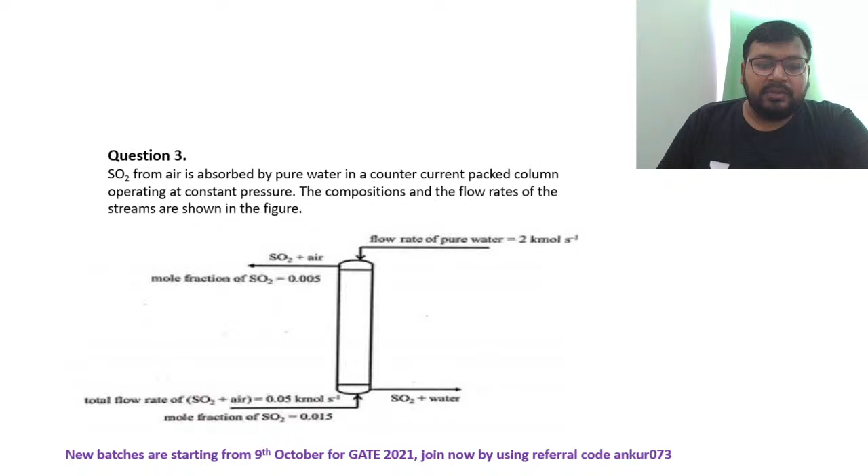Then this question, I explained it, but first I wrote all the data, then I told you what is the meaning of dilute operation.

Then we applied the absorption factor formula. Then we calculated the NTU using a very simple formula: entry minus exit, divided by exit minus equilibrium.

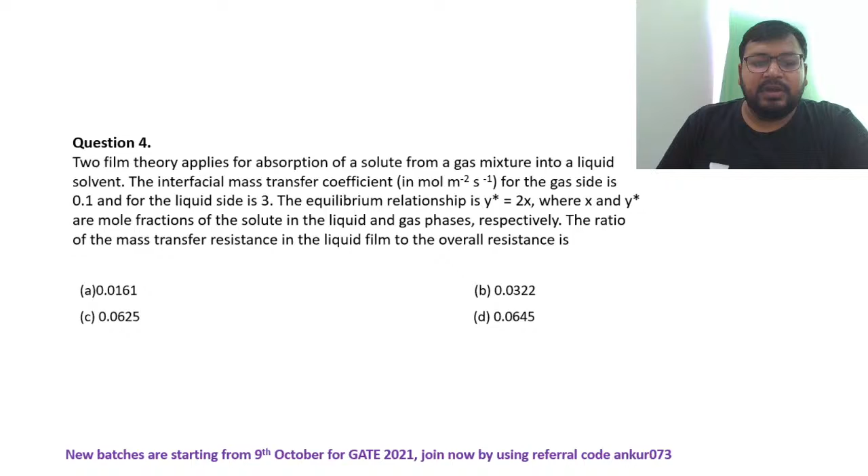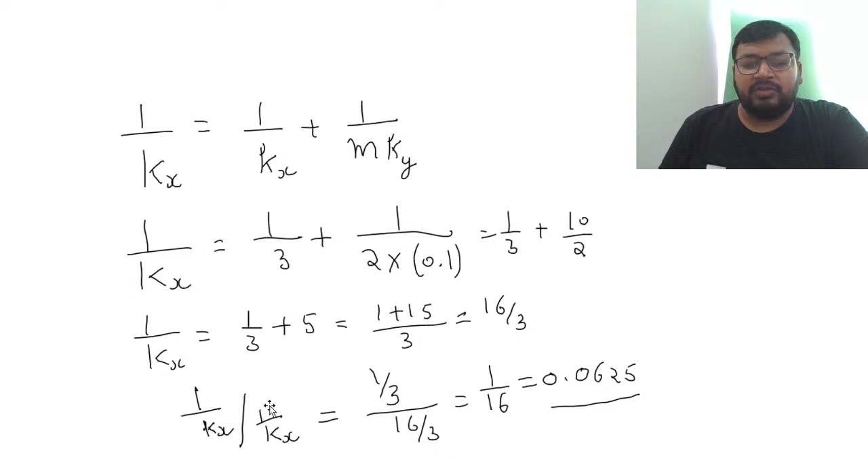After that, in the two-film theory, we first decide the direction of transport. Then we write down the known data. Then we use the relation of the overall mass transfer coefficient formula, and then we calculated the resistance of the individual liquid side relative to the overall mass transfer resistance.

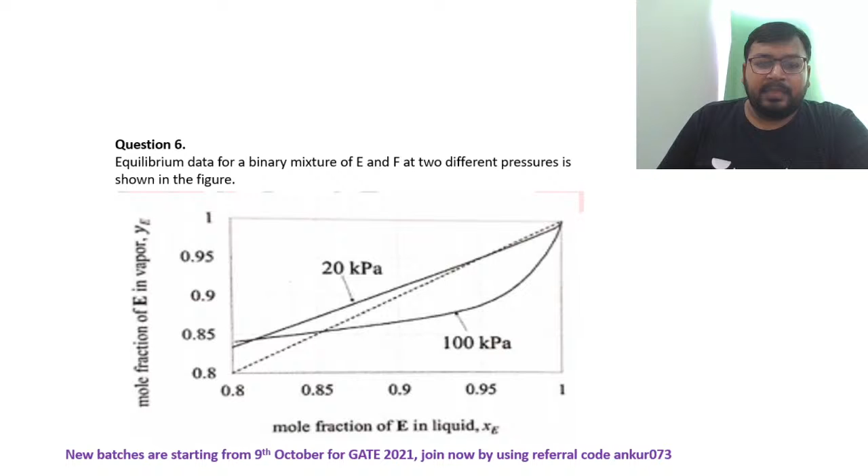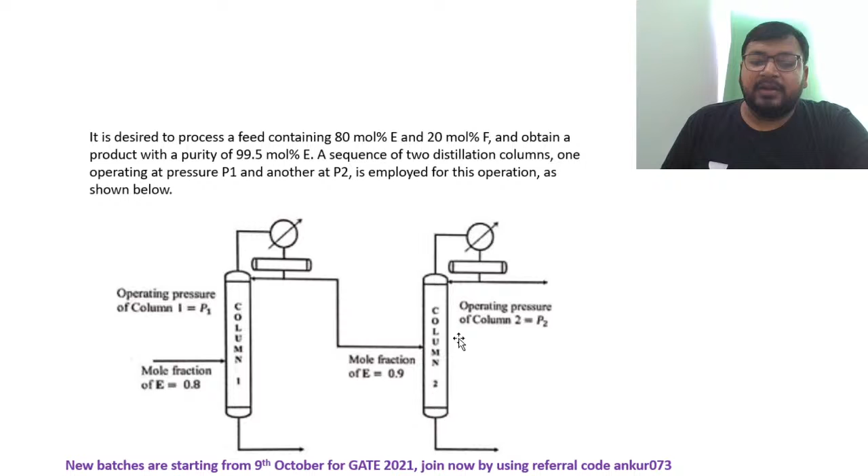Then we have this question, and it is very simple guys. All the data is given: the feed enters at 0.8 mole fraction, then from the top we get a mole fraction of 0.9 for the distillate. Then it enters column number 2, and we get the product out. So we determine which column operates at what pressure, and what is the purity.

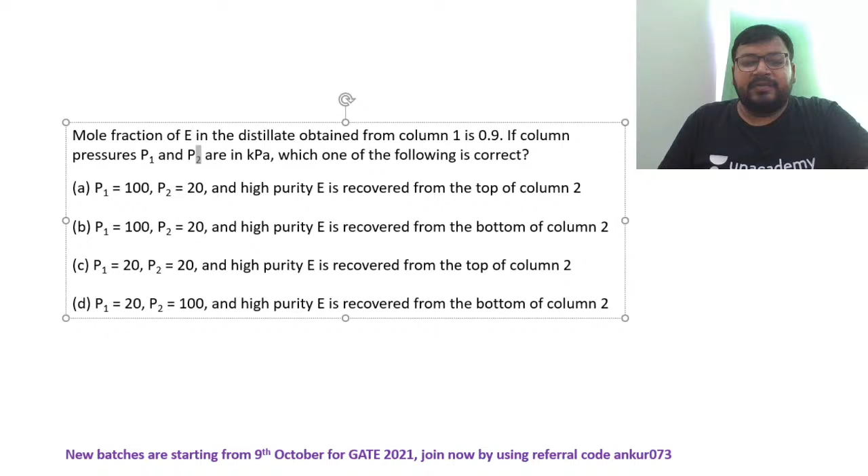Okay guys, so just correcting the representations. 0.8 is the mole fraction at which the feed is entering, and as we move forward we reach the equilibrium line operating at 20 kilopascal. So the first column operates at 20 kilopascal, and then we get a distillate of 0.9 mole fraction. This distillate becomes a feed to the second column, and above there is nothing, so we have to go down.

Below we get the second curve operating at 100 kilopascal, and then we get the product at a mole fraction of 99.5.

This 99.5 we are getting below the diagonal line, and that's why we said the product will be obtained at the bottom of the column, because D1 is obtained at the top of the column and it is above the diagonal. Analogically, this point is below the diagonal, so the product should be obtained at the bottom of the column.

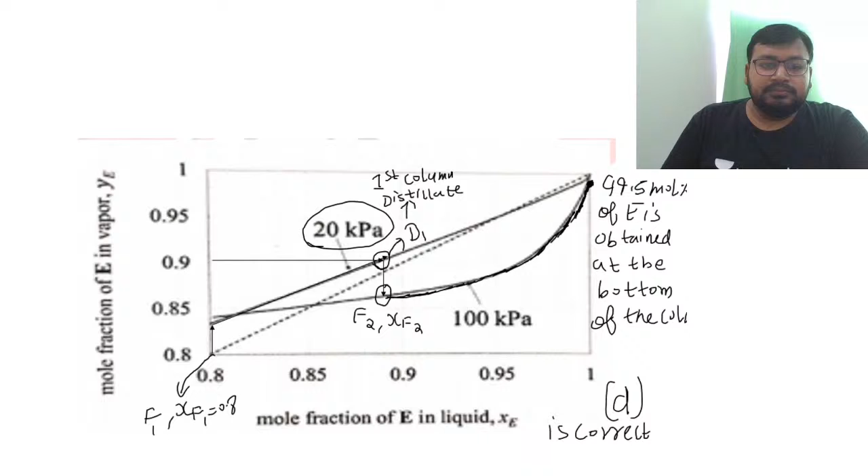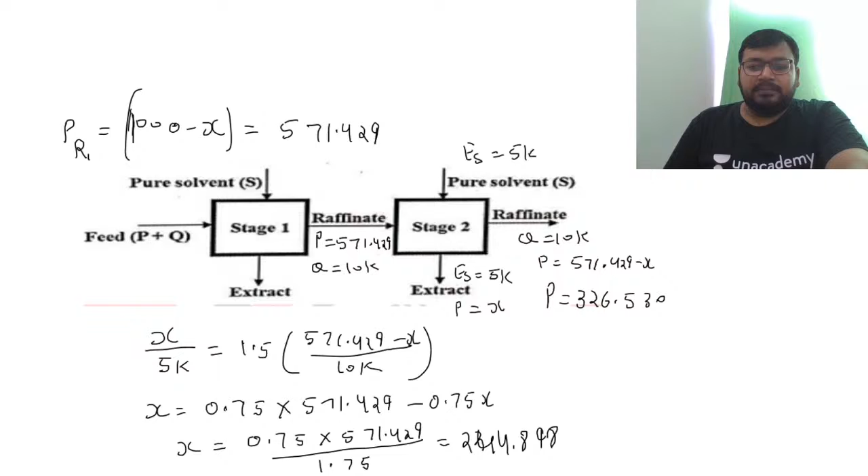Then we solved this 8th question, which we had jumbled also yesterday.

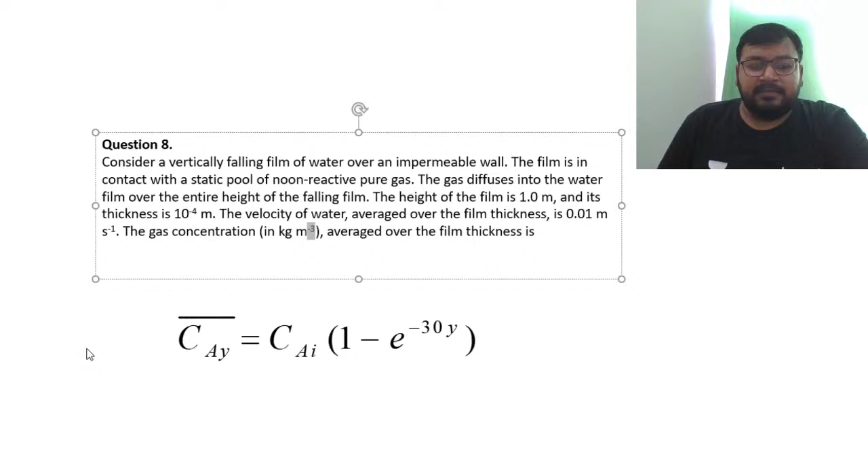In this case, we first calculated the mass transfer taking place within dy, and that mass transfer is mass in minus mass out, multiplied by the area. The area available for this mass transfer is the width of the wall, and it's clearly given that along the width the concentration is invariant, so concentration is not changing along the width. So there is no change in the width, multiplied by delta, the thickness of the water film.

So W into delta becomes the area, and the direction of transport is in the y direction. That's why the area available for mass transfer will be W into delta, as the area must always be normal to the direction of diffusion.

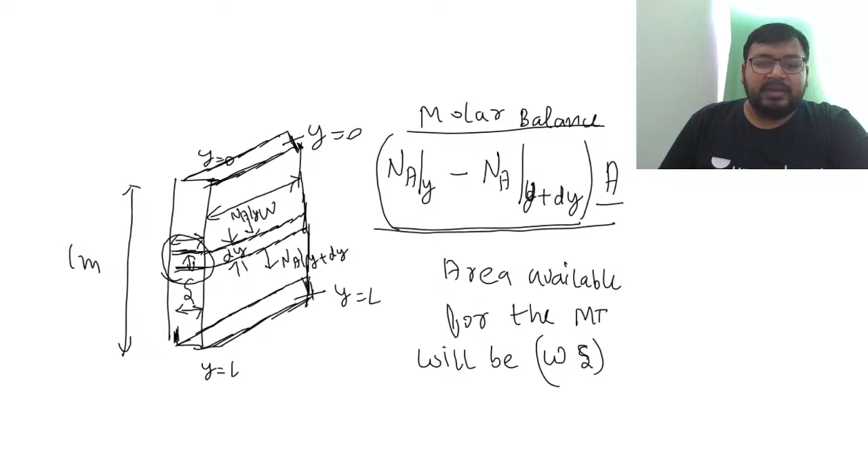Then we calculated how much mass is diffusing from the gas side to the liquid film, the water film. We calculated it as NA into W into dy. W is the width, over the width it is going, and for a small thickness of dy, we calculated how much mass transfer happened within dy.

So mass in was Na at y, mass out was Na at y plus dy. So the mass transferred along that dy, that movement can be written as Na into A, where A is W into dy. So for that small thickness, the area will be dy into W.

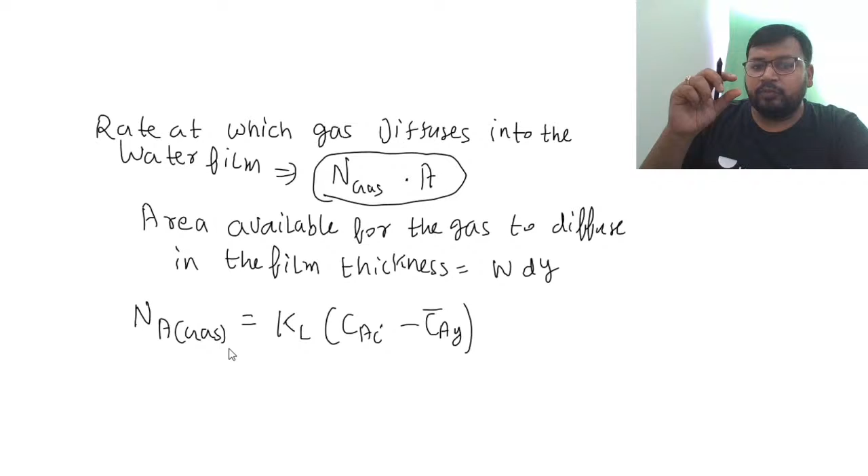So that is the mass that must have transferred from this small width - this is the mass entering at y, and this is the mass exiting at y plus dy.

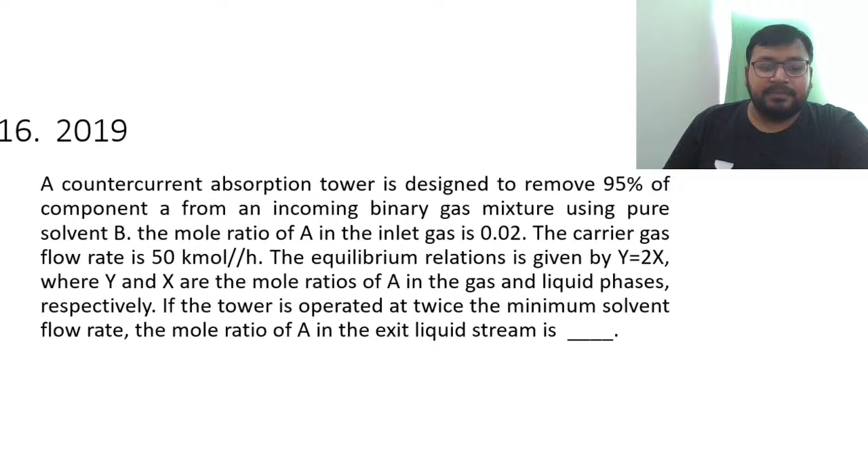Then we calculated this absorption question. We made the diagram, the absorption column, the graphical thing. We calculated the slope, and from that slope I calculated the value of LS optimum, which is twice the minimum, and then I applied the mass balance to calculate the actual value.

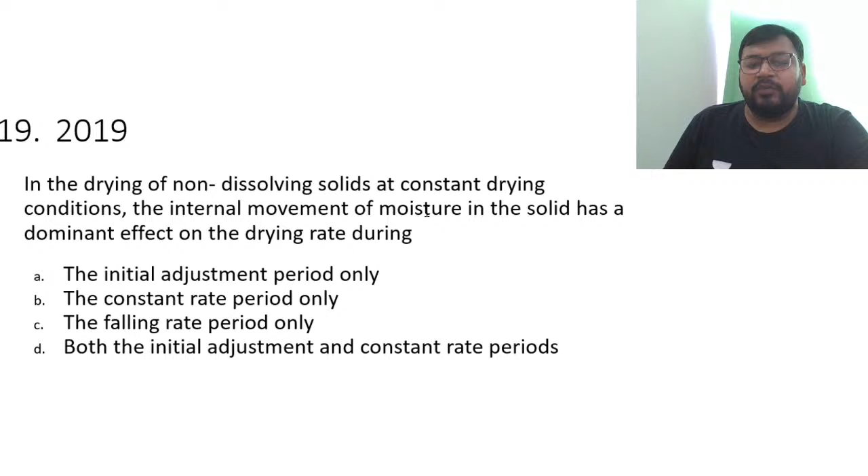Then we have the drying of non-dissolving solids. So guys, when we do the drying and the internal movement of moisture is taking place, internal movement of moisture is taking place only in the falling rate period.

And how does the movement take place, guys? The movement may take place by capillary action, or movement may take place by diffusion.

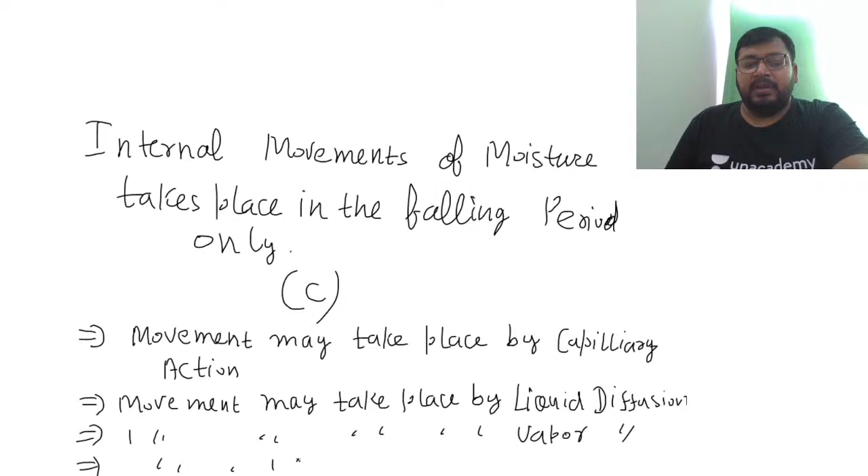Movement may take place by liquid diffusion, movement may take place by vapor diffusion, and movement may take place by the solids which shrink due to heat. So some solids thermally expand while some solids thermally shrink. So by any of these reasons the movement can take place.

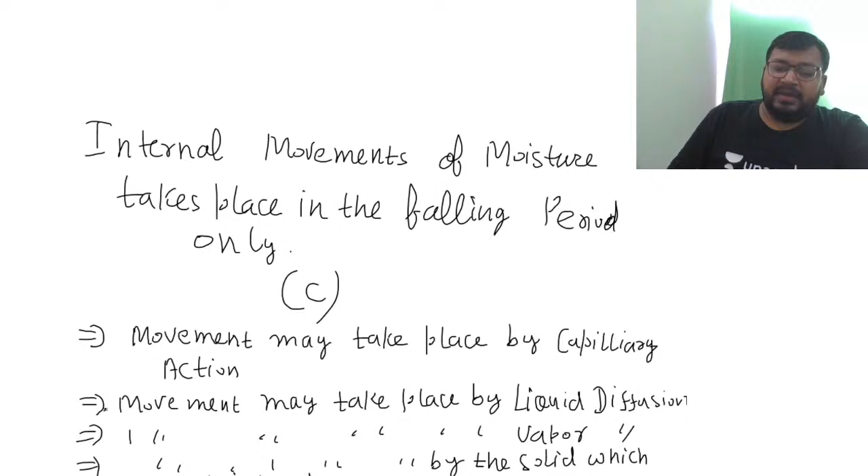And guys, this is the next question. So take your time, write this down first before moving ahead.

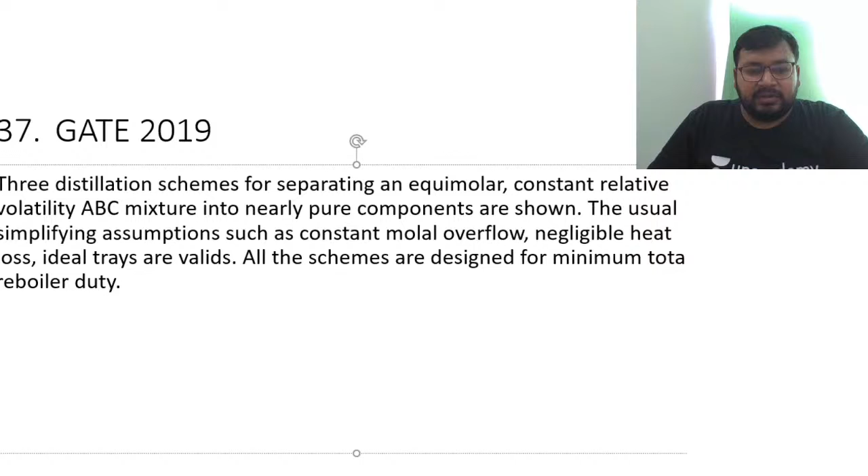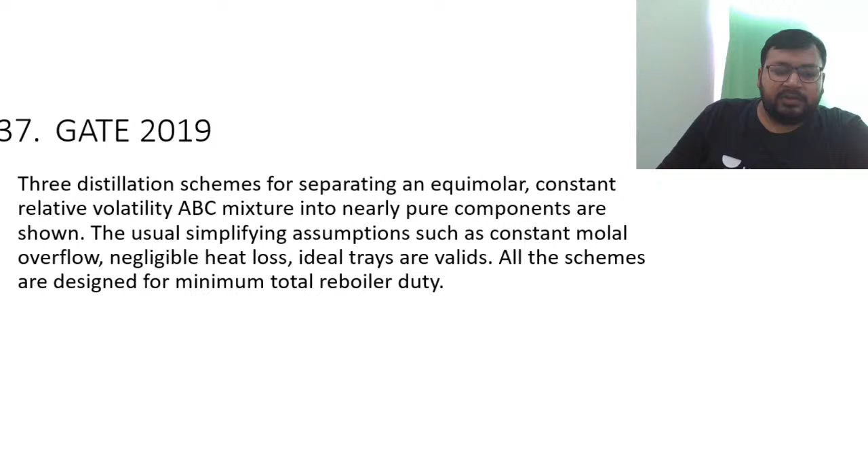I hope it is visible to you. Write it down so that I can show you the next slide. I hope you've written it down. These are the sequences, you can make the sequence, and then I will show you the questions.

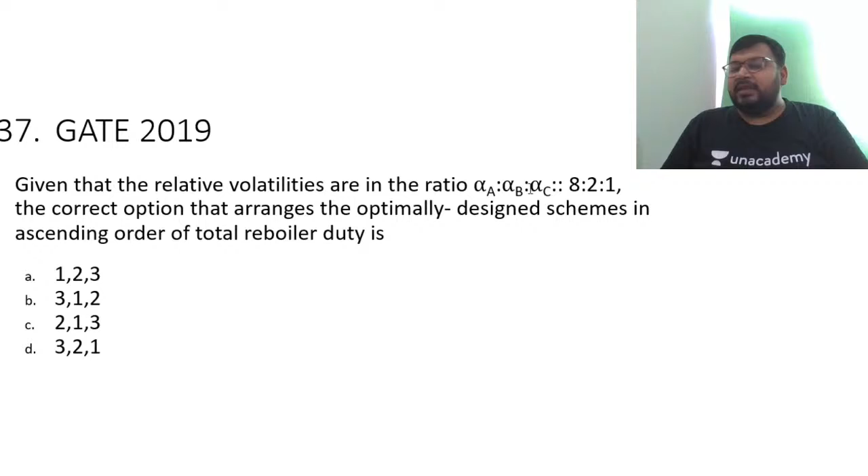And according to B and C you can see which one is more volatile. A is highly volatile because it has a relative volatility of 8 with respect to C. B is volatile but not that much because it has a relative volatility of 2 with respect to C, and C is very less volatile.

So the component which can be easily vaporized, you collect that at the top, and the component which is difficult to vaporize, you are collecting that at the bottom. You are collecting A at the top since it can be very easily vaporized, but which are difficult to vaporize, you are collecting them at the bottom.

So at the bottom, if you get a component which is difficult to vaporize, what will happen? The reboiler duty will increase.

Reboiler duty increase करेगी, because अगर यहाँ पे A होता, then A can be easily vaporized and it will contribute to the vapor flow rate. तो जो भी वेपर फ्लो रेट यहाँ पे जाता उसके अंदर A के वेपर्स होते. ठीक है, तो A कंट्रीब्यूट करता अगर A होता तो, बट क्योंकि A नहीं है, B और C है, तो B और C को वेपराइज करना, एक वेपर फ्लो रेट जनरेट करना, इट्स टफ. तो रिबॉयलर ड्यूटी हेयर इज मोर.

एंड अगेन, अब सिर्फ यही नहीं, B और C को यहाँ ही नहीं, यहाँ भी अब C को वेपराइज करना है टू मेंटेन दैट वेपर फ्लो रेट. नाउ दैट इज अगेन वेरी टफ बिकॉज C इज हैविंग ए रिलेटिव वोलेटिलिटी ऑफ 1. इट इज द रेफरेंस.

ठीक है, हमेशा याद रखना ये एक रेफरेंस में कैलकुलेट होती है. जब मैं बोलता हूँ कि अल्फा इज 2, इट मीन्स विद रिस्पेक्ट टू B, A इज ट्वाइस एज वोलेटाइल. ठीक है, ये इसका मतलब होता है. सो C की 1 है, दैट मीन्स विद रिस्पेक्ट टू 1 वी आर कैलकुलेटिंग दैट द A कंपोनेंट इज 8 टाइम्स एज वोलेटाइल एज C.

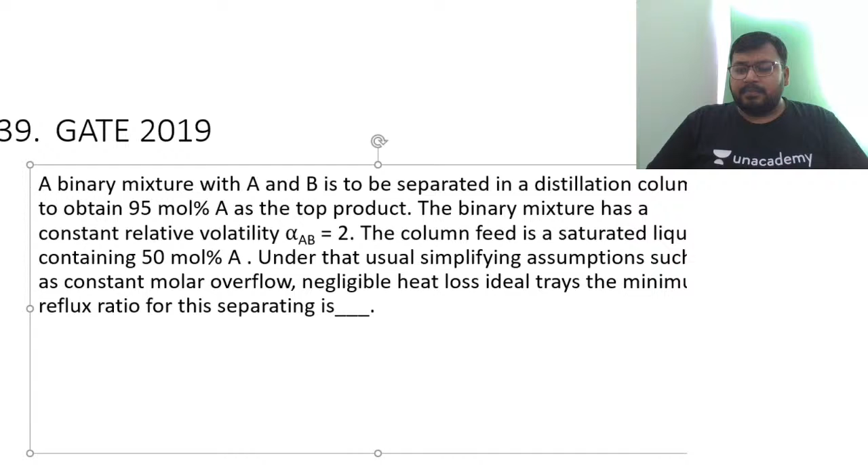A binary mixture with A and B is to be separated in a distillation column to obtain 95 mole% A as the top product. So 95 mole% A as the top product. The binary mixture has a constant relative volatility of 2. The column feed is a saturated liquid containing 50 mole% A. So for saturated liquid, Q is equals to 1, and 50 mole% A, that means XF is equals to 0.5.

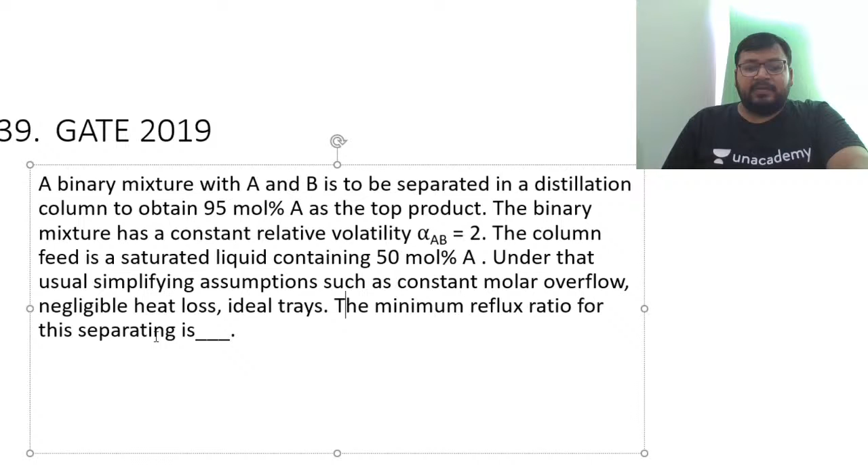Under the usual simplifying assumptions such as constant molar overflow, negligible heat loss, ideal trays, the minimum reflux ratio for this separation is...

You need to find the minimum reflux ratio, guys. And what is minimum reflux ratio? Minimum reflux ratio is xd minus y dash divided by y dash minus x dash, where, as I told you, what is x dash y dash? X dash y dash is the point of intersection

between the feed line and the equilibrium curve. So guys, alpha is given as 2, so that means the equilibrium curve, alpha is given as 2, so equilibrium curve can be written as y equals 2x divided by 1 plus (2 minus 1) into x, so that is 2x divided by 1 plus x, so that is the equilibrium curve. And for saturated liquid, for the feed line, first of all, what is the feed line, guys?

Y is equals to minus q by 1 minus q into x plus xf by 1 minus q. So for saturated liquid, we know that q is equals to 1. So when q is equals to 1, what is the slope? The slope almost becomes infinity.

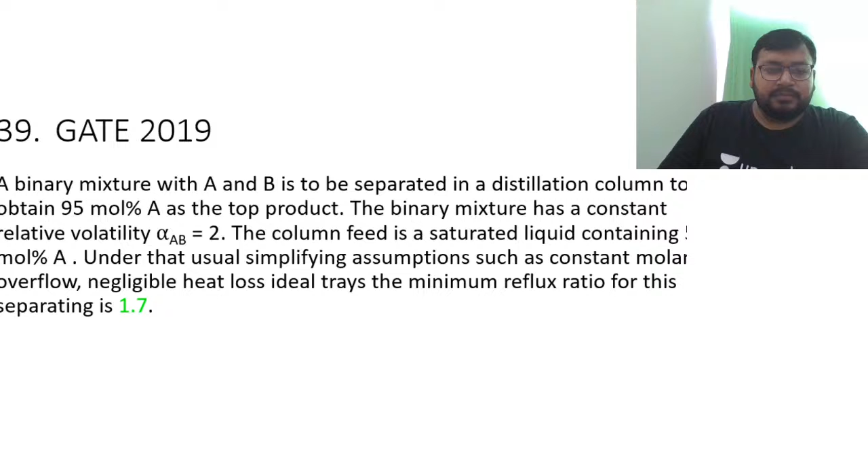Okay, take 3 minutes again to solve.

So Ankur Datta has commented 0.66 and 1.81.

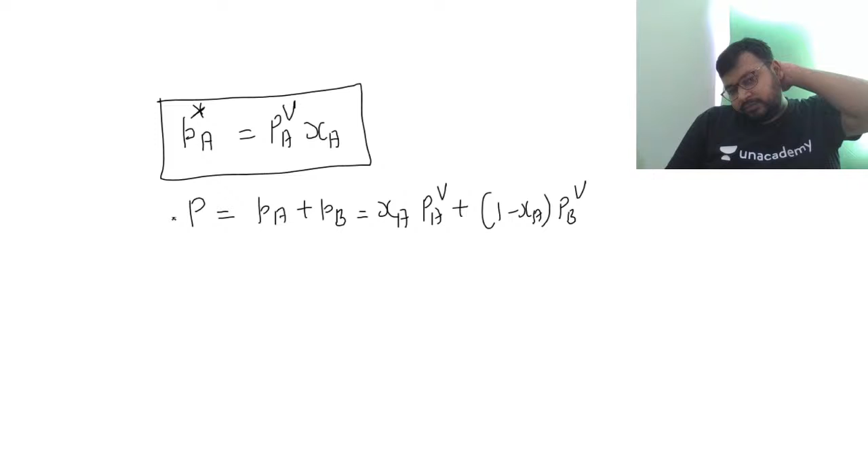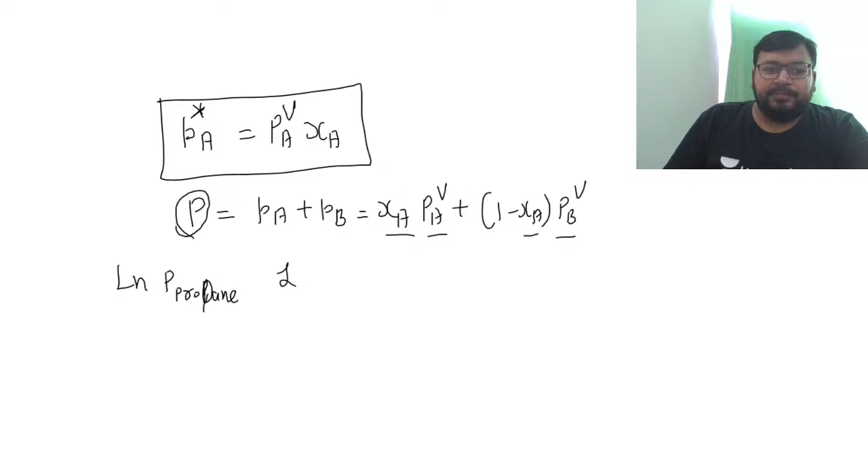So we need to calculate the total pressure. We already have the concentration. What we need is vapor pressure of A and vapor pressure of B. Saturated liquid is at 55 degrees Celsius, so let us calculate the vapor pressure of propane and vapor pressure of butane at 55 degrees Celsius.

The Antoine equation is given to you. Just put down the value of the temperature and then calculate the Psat in bar. Calculate fast using the virtual calculator - what is the value for propane and butane?

If you calculated correctly, the value of the vapor pressure of propane at 55 degrees Celsius, that is 328.15 Kelvin, comes out to be 18.65 bar, and the value of the vapor pressure of butane at the same 55 degrees Celsius, or 328.15 Kelvin, is 5.59 bar.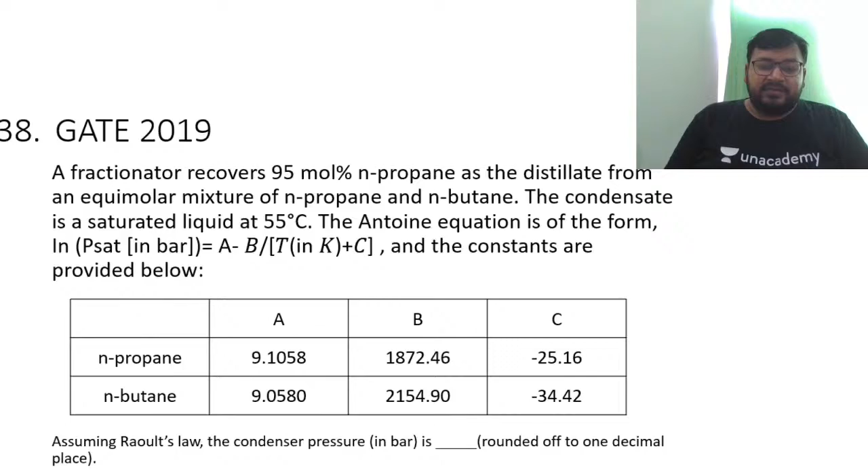So vapor pressure values are known at 55 degrees Celsius for A as well as B, that means for propane as well as butane. It is given that 95% of N-propane is recovered as the distillate, so the value of XA comes out to be 0.95. So the total pressure can be calculated - just put down the value of PA vapor and PB vapor. The total pressure comes out to be 17.97 bar.

If you calculated it, that will be your answer, coming out to 17.97 bar. That's a very easy question.

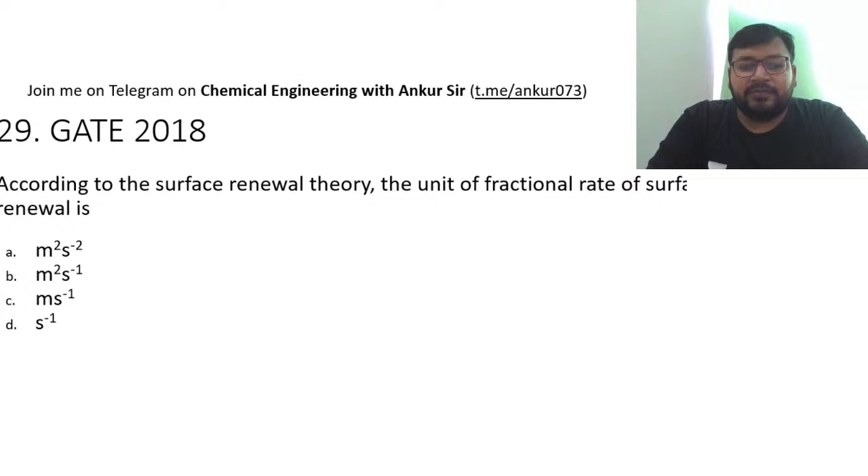So what is surface renewal theory? Surface renewal theory says KL is equals to under root of DAB into S. This S is known as the surface renewal frequency.

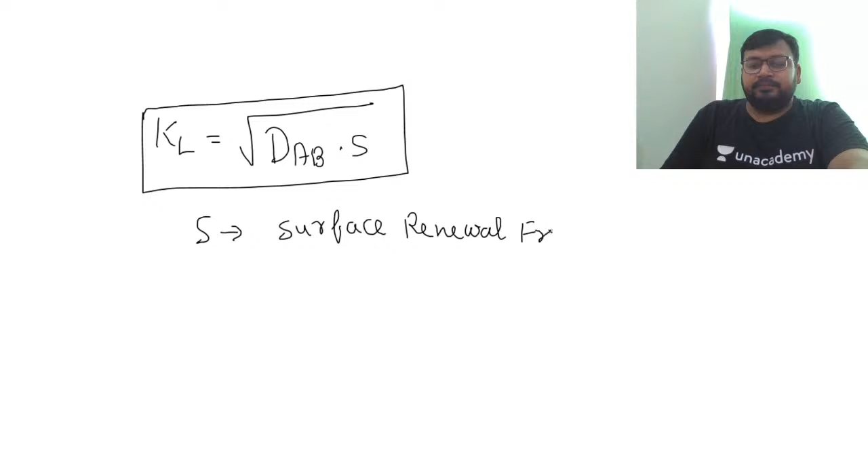So what is surface renewal frequency? It is the fraction of surface area renewed per unit time.

So guys, if this is the spherical bubble and that is a liquid particle coming down, that is the total area that the liquid particle will cover. Let's say this total area is AT. Now the area covered by the liquid particle is, let's say, this much.

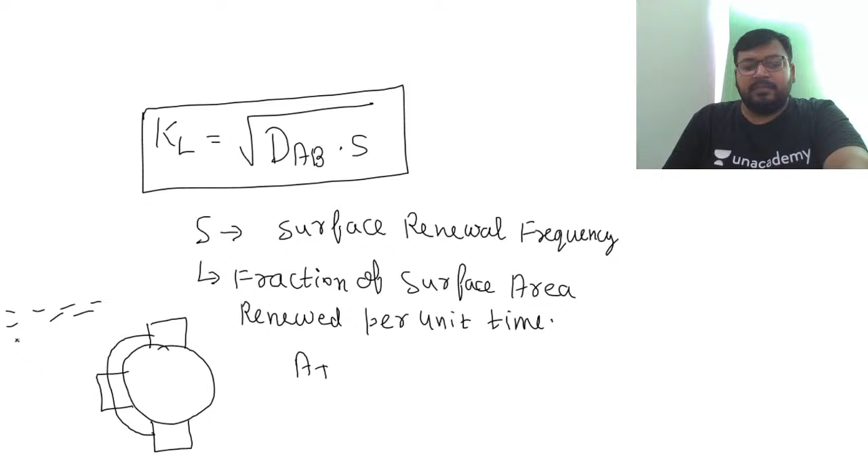After that, what will happen? From the fresh bulk, a liquid particle replaces it, and after the replacement, the new particle is there. So the area left for the new particle to cover will be this much only. We need to calculate how much area is covered.

So let's say the area covered is AC. Total area minus covered area gives you the renewed area. And if you divide it by AT again, this fraction will be the fraction of renewed area.

And when this is divided by time, that becomes the frequency, the surface renewal frequency. So area by area gives no units, but per unit time is there. So the unit of S is per unit time. Surface renewal frequency has a unit of per unit time.

So what is the correct option? The correct option is D. So the answer is D. Very easy question. Moving forward, next question.

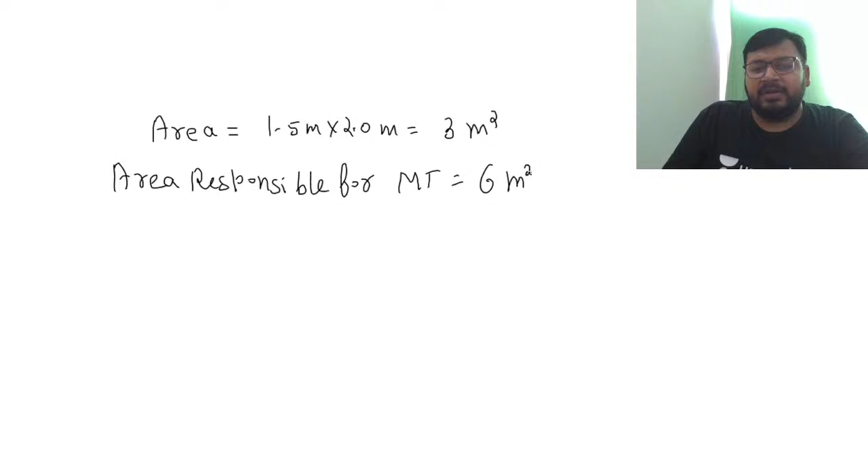So what is the area currently? 1.5 meter into 2 meter. So the area will be 1.5 into 2, that is 3 meter square. But the area responsible for mass transfer - 3 meter square available at the top, 3 meter square at the bottom - so that will be 6 meter square total, top and bottom.

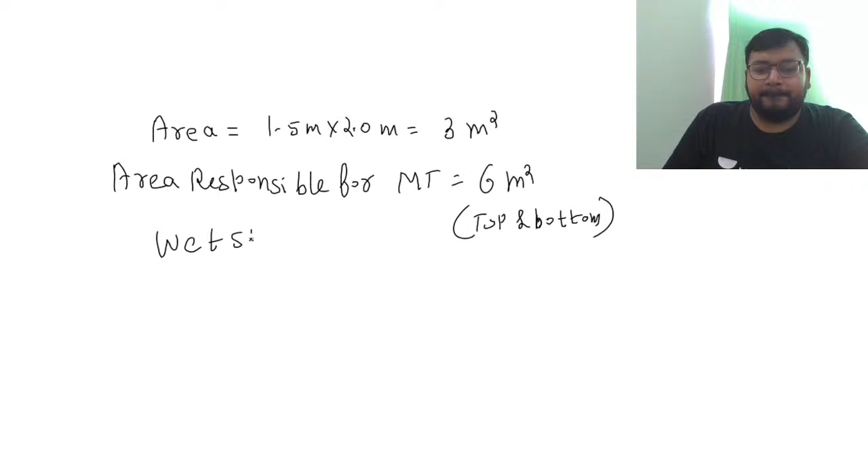The wet sheet weighing 16 kg has an initial moisture content of 60%. Wet sheet weighing 16 kg, with initial moisture content of 60%, not 16%.

So how much is the moisture in kg? Amount of moisture initially present is 16 into 0.6, that is 9.6 kg. That much moisture is present. So this is the amount of moisture initially present.

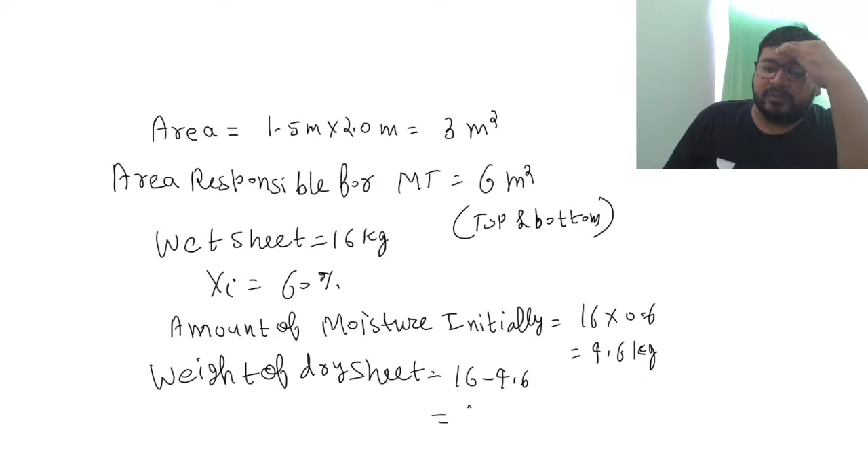Now this moisture is present, so what is the weight of the dry sheet? The weight of dry sheet will be the total weight of the sheet minus the moisture present, and that comes out to be 6.4 kg. So 6.4 kg is the weight of the dry sheet, at 60% initial moisture.

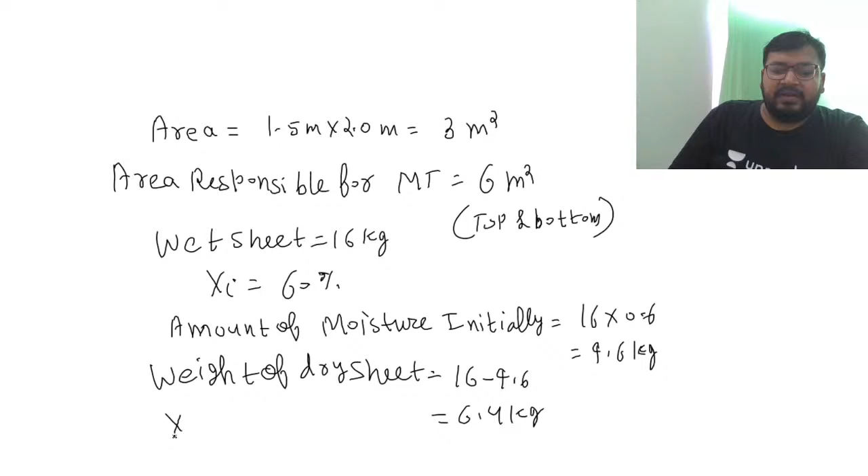So this wet sheet loses moisture at a constant rate of 1.25 into 10 to the minus 5 kg per meter square per second until the moisture content falls to 30%. So the final moisture content is given as 30%.

What is the formula guys for the constant rate period? It is Ws by A Nc, times (xi minus xc). All the moisture contents are on the dry basis.

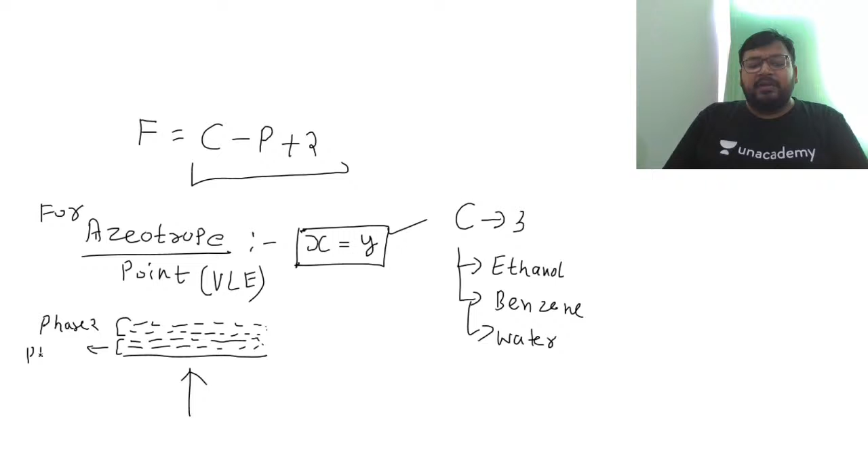So there are 2 phases. Let's say this is phase 2, and this one is phase 1. So 2 phases of liquid are forming, and then the vapor is going out.

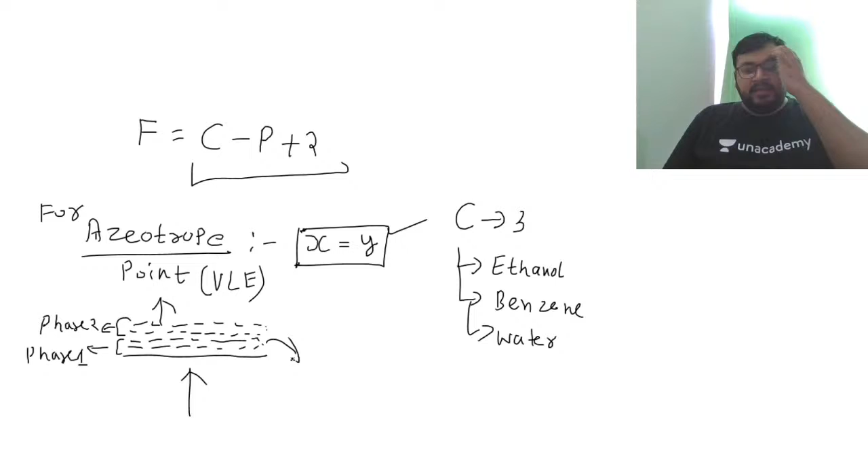of phase 2 as well as some effect of phase 1. Both will have an effect.

So in that case I cannot say that x is equals to y. We cannot say that because x is itself not known, because phase 2 will have a different x, phase 1 will have a different x, and in that case x cannot be equal to y.

So generally for the case of azeotrope, this is the special condition that we use, and that's why instead of 2 for the case of azeotrope we write 1.

But here for the VLLE system we will write C minus P plus 2 only, because this special condition would not be there. So F is equals to C.

How many components? 3 components. How many phases? Vapor, liquid, liquid - 3 phases, plus 2. So what is the answer? 2. So degree of freedom for VLLE system is 2.

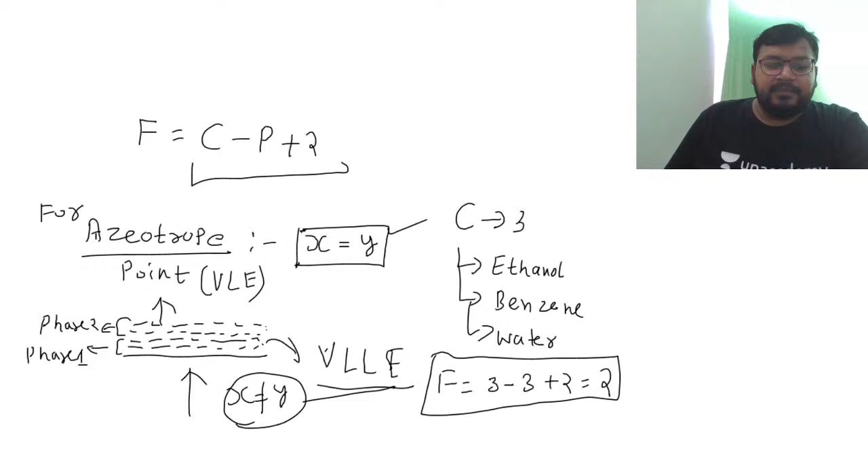So that is your answer guys. Moving forward, next question. This is the next question.

The ratio of liquid to vapor molar flow rate in the enriching section is... what is this? What is L by V of the enriching section?

Slope of the operating line. And guys, slope of the operating line for the enriching section can also be calculated as R by R plus 1. That is also the slope of the operating line for the enriching section.

And what is R? R is 2. So what is L by V? L by V will be 2 by 2 plus 1, that is 2 by 3, 0.667. So that is the slope, rounded off to third decimal place. 0.667 is your answer, guys.

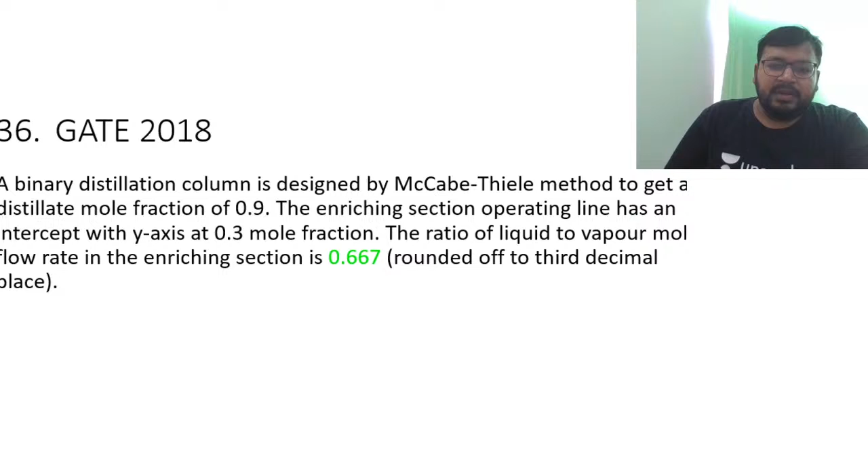So very easy question. Just you need to remember that slope of the operating line is L by V, as well as the slope of the operating line is R by R plus 1. That's all. Very easy question. Moving forward. This is the next question, guys.

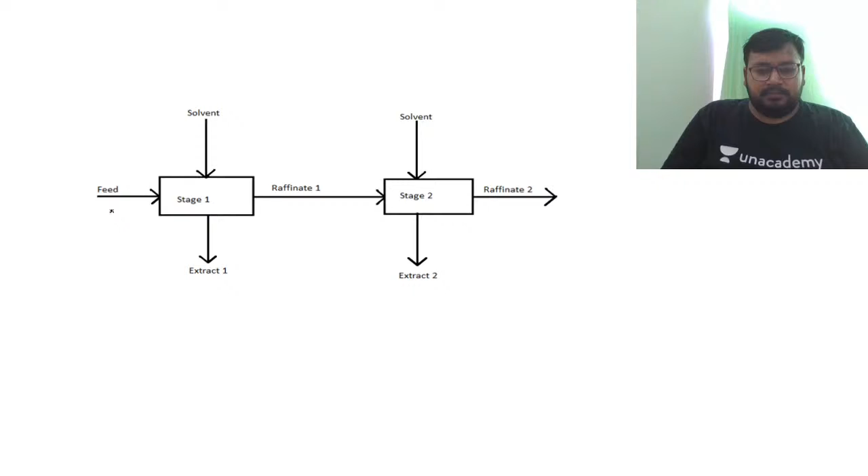So what we do is assume initial value as 100 kg, for our simplicity. So feed flow rate is 100 kg. So how much is the solute? The solute is given the symbol A.

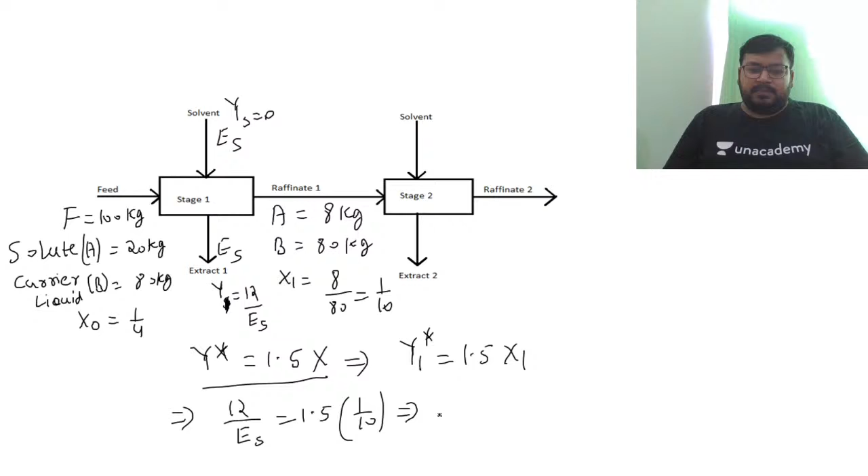So ES will be 12 into 10 divided by 1.5. So 12 into 10 is 120... and divided by 1.5 gives 80.

ES will be 80, guys. They have said the same amount of flow rate is being added to both stages, using equal amount of pure solvent C in each stage. So if 80 is fed here, then 80 must be fed here also.

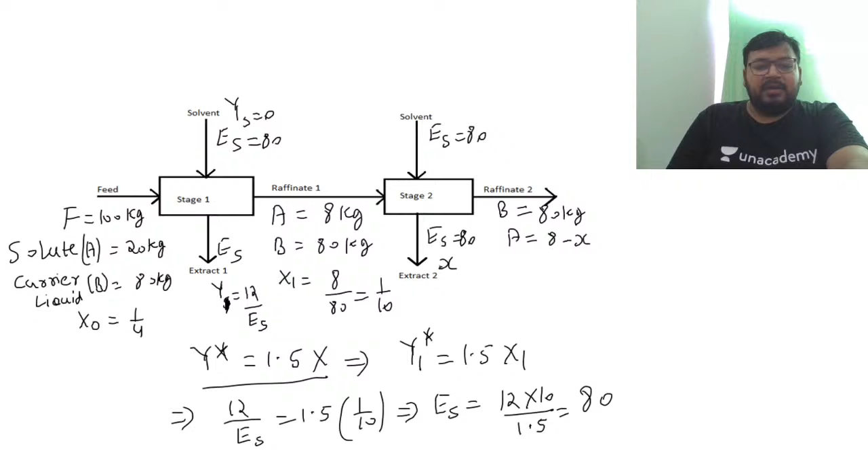How much amount of B is there? It is 80. But how much amount of A will be there? We don't know, so let's say the amount of A left here is 8 minus X, and the amount transferred here is X. Now let us apply the equilibrium relationship.

That is Y2 star equals 1.5 times X2. What is Y2 star? Y2 will be the moles of solute to moles of solvent, that is X by 80. And 1.5 times X2, where X2 is the moles of solute to moles of carrier liquid, 8 minus X by 80.

So 80 cancels. X equals 1.5 into 8, that is 12, minus 1.5X. So 2.5X equals 12, and X will be 12 by 2.5, which is 120 by 25, that is 24 by 5, equals 4.8. So X is 4.8.

So what is 8 minus X? 8 minus 4.8, that will be 3.2 kg. So 3.2 kg will be left in the raffinate, and 4.8 kg will be transferred in the extract.

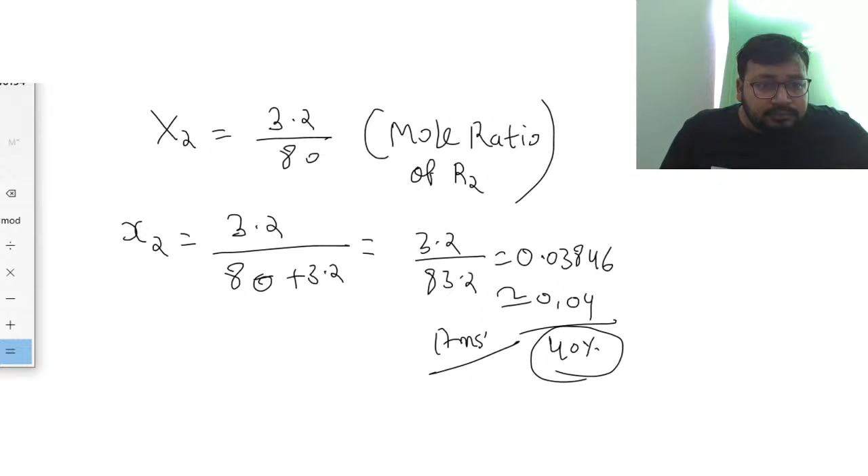40% doesn't seem right. It should be 0.04. Let me check the answer.

Okay, so the rounding off we can do after the percentage. First of all we take the percentage, so that can be written as 3.846%, and rounding off we will do after the percentage, to the second decimal place.

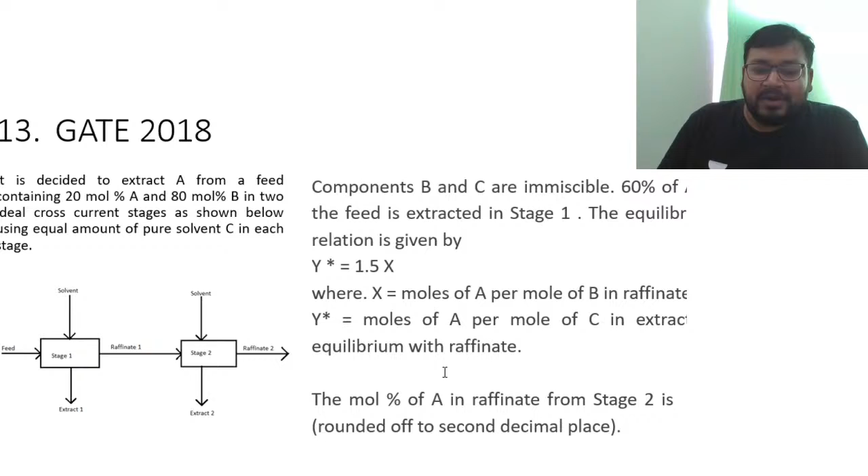I get what? 3.85%. That should be the answer. The rounding off we need to do is in the second decimal place, but not in mole fraction, in percent, because our answer was asked in percent, mole percent. So first calculate the percentage and then we will do the rounding off. So 3.85% is your answer, guys.

Okay, next question, guys.

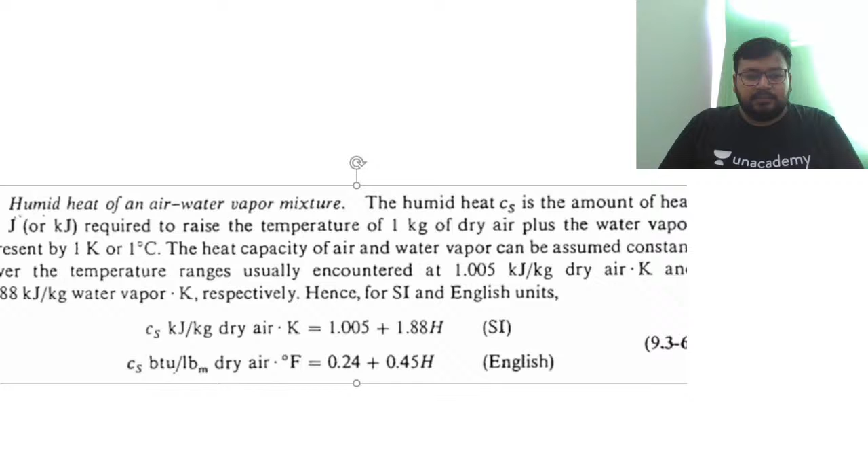I hope now it is visible to you. So this is the cutting of humid heat. What is humid heat? Humid heat is the amount of heat in joule or kilojoule required to raise the temperature of 1 kg of dry air plus the water vapor present by 1 Kelvin or 1 degree Celsius.

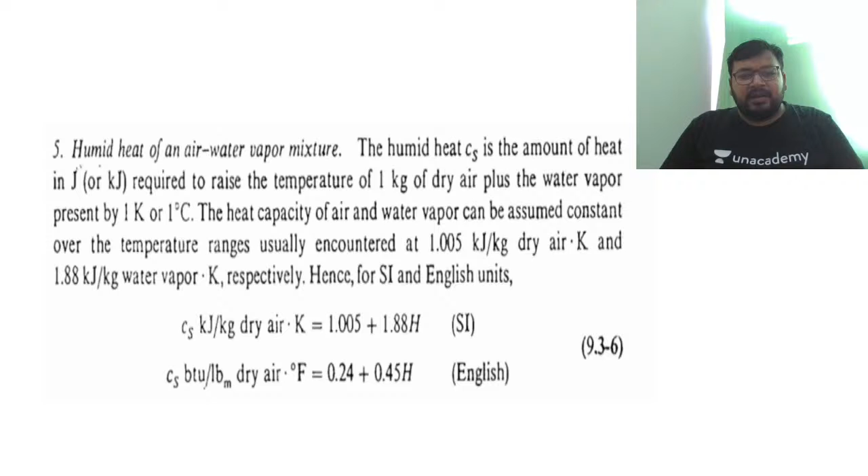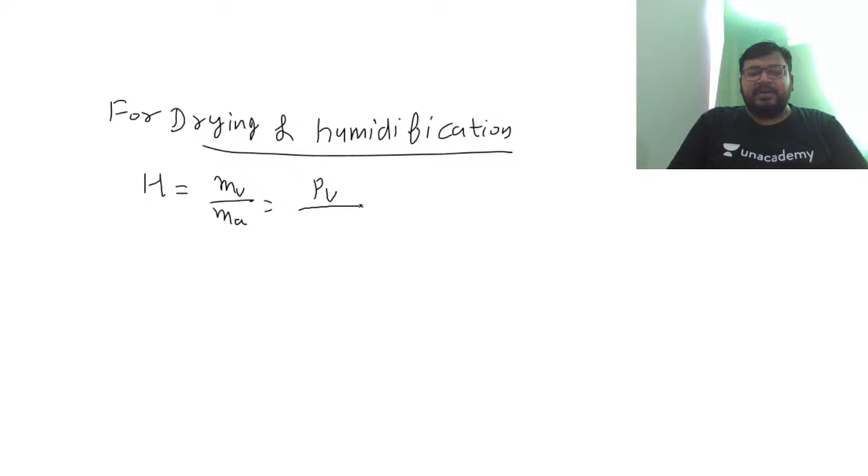One thing we know, guys, is that the humidity is given as the mass of water vapor to the mass of dry air, which can be represented as partial pressure of water vapor to total pressure minus partial pressure of water vapor, meaning this is the partial pressure of the dry air. Now generally we know that the total pressure is much greater than the partial pressure of water vapor, because water vapor content is very very less - 78% is nitrogen, 21% is oxygen - so water vapor can only exert so much pressure. So H can also be written as PV by P, which becomes Y. So Y can be written as H.

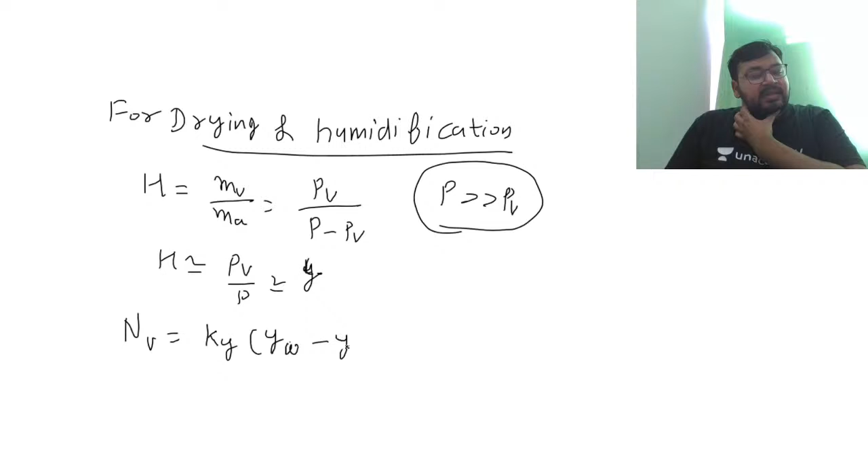And what is the flux for the case of water vapor? The flux for water vapor can be written as KY into Y, which we can say is the value of the mole fraction at the layer near the interface, let's say W, and this is the value of the mole fraction of water vapor in the air. So let's say this is a solid body with moisture present, and this is the drying air. Here the layer of air has a mole fraction of YW, and here the layer of air has a mole fraction of Y. So this YW minus Y is shown here, and this is why mass transfer is taking place. So it can be written as NV equals KY into...

Now this is not only the partial pressure ratio, along with that we also get the value of 0.622. What is 0.622? The molecular weight of water vapor to the molecular weight of dry air, that is the whole formula. So the value of YW, written as HW, and Y written as H, in terms of H will be MA by MV. That is the flux guys, the flux of the water vapor.

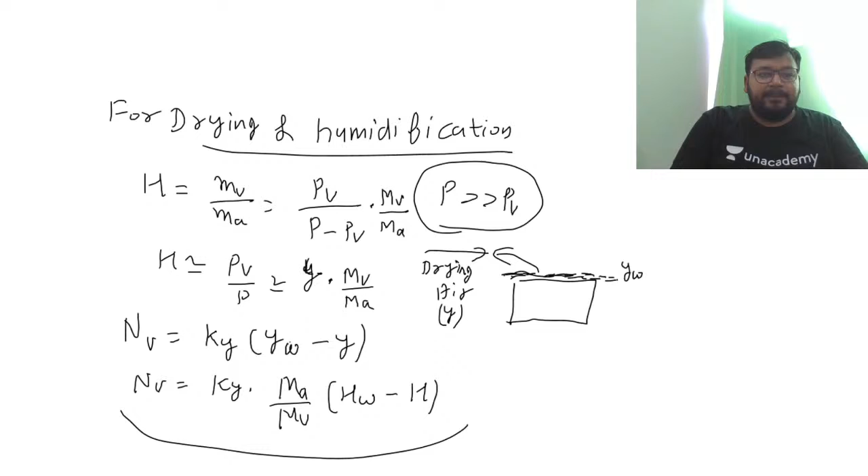Now if I calculate this flux with the area, area is in meter square, flux is in kilomole per meter square second. If I multiply this with the molecular weight of water vapor, in kilogram per kilomole, kilomole cancels, meter square cancels, finally I get kg per second. Kg per second is the rate of mass transfer. And rate of mass transfer multiplied by lambda, the latent heat of vaporization, that is joule per kg, finally gives the rate of heat transfer.

This is rate of mass transfer. But rate of heat transfer also equals Q, and Q equals HA into T minus TW. So that means A into NV, where NV is KY into MA by MV into HW minus H, into MV into lambda, equals HA into T minus TW. So A and A cancel on both sides, MV cancels, and we get KY into MA into HW minus H equals H into T minus TW by lambda.

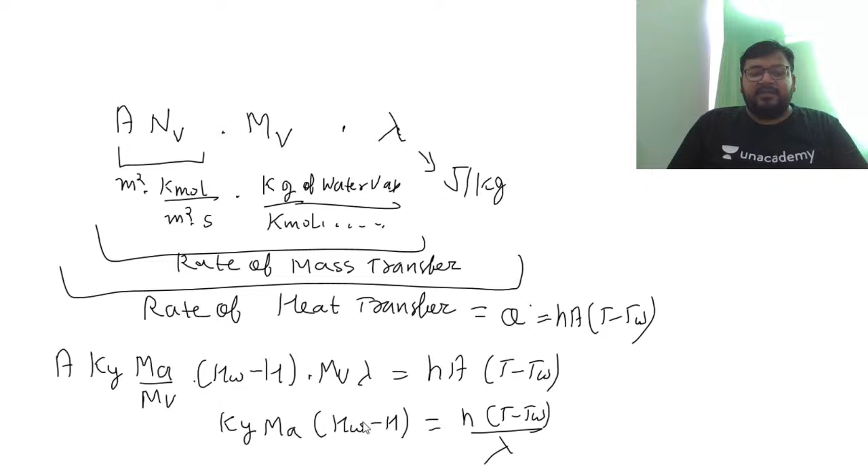And if I rearrange this again, then I can write H by KY into MA. The rest goes to the other side, so we get HW minus H into lambda divided by T minus TW. That is the formula we get, guys, and this is known as the psychrometric ratio.

This is a very important derivation; without deriving it you cannot understand it. You need to derive it on your own also. So the psychrometric ratio is given in the question, lambda is also given, that is 2500 kilojoule per kg, and T and TW are also given. T is the dry bulb temperature, given as 65 degrees Celsius, and they have given another temperature, the adiabatic saturation temperature, which can be considered as the wet bulb temperature. So T and TW are given, latent heat of vaporization lambda is also given, and one H is given, the humidity of the air, but the humidity of the water vapor is not known. This H is the humidity of the layer of air just adjacent to the moisture, and that we need to find.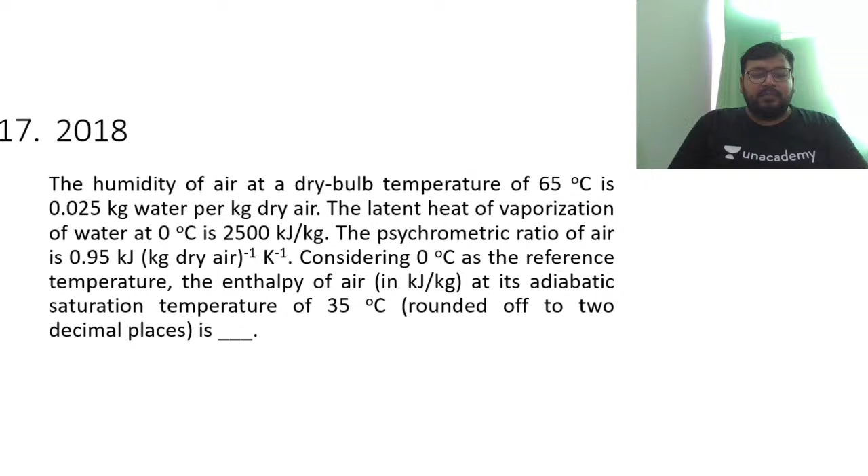So H is known, that is 0.025. T is known, that is 65 degrees Celsius. TW is known, that is 35 degrees Celsius. H upon KY into MA is also known, given as 0.95. Humidity is 0.025, and lambda is given as 2500, with T and TW as 65 and 35. So just put all the values and calculate HW.

From here your HW will come out. And then in the formula of humid heat, you can use this formula: 1.005 plus 1.88 H, which you have already calculated, multiplied by T in degree Celsius, which is 35 degrees Celsius, plus 2501.4 H. Instead of using 2501.4, you can use 2500 since that is given in the data. So instead of 2501.4, just use 2500 and calculate the enthalpy, and whatever enthalpy you get will be your answer, guys.

So you should check the answer for this one. And guys, the session is over, just one question is left.